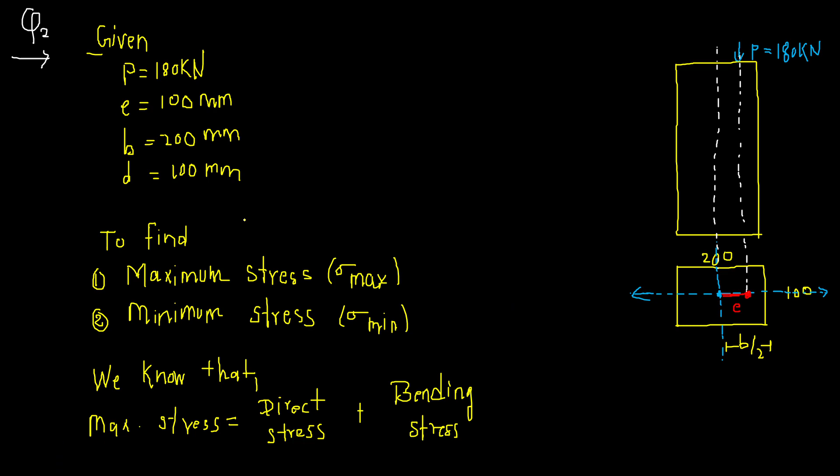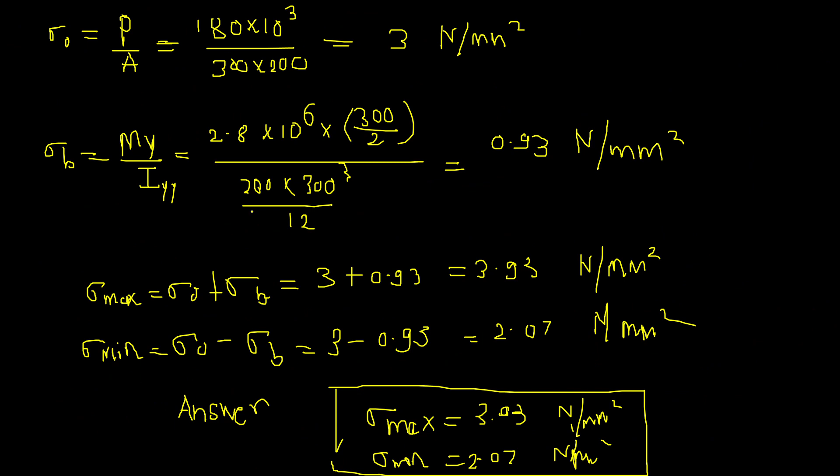So we have seen the first 5 problems of the assignment. So now we will start with the question number 6. Question number 6.

So a hollow cast iron column, CI म्हणजे cast iron column, of external diameter 250 mm and internal diameter 200 mm carries an axial load W and a load of 100 kN at an eccentricity of 175 mm.

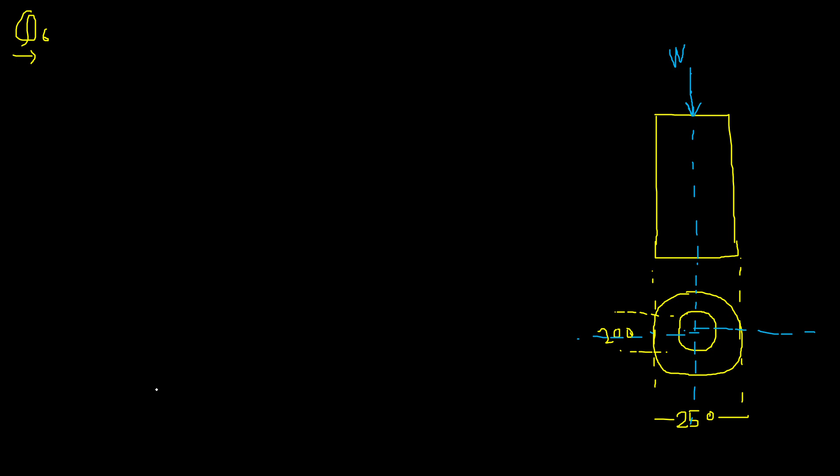अजून एक लोड आहे eccentric load of 100 kN. So it is present at some distance E. Okay, so this is the location of the eccentric load. So we will draw the line here. तर इथे अजून एक लोड आहे, that is P, eccentric load, and the value of this P is 100 kN. Okay, so this much is given.

आता काढायचं काय आपल्याला, we have to calculate the value of this W, जे W axial load आहे. So for calculation of this, one condition is given, that is we have to find out the minimum value of W so as to avoid any tensile stresses. Tensile stresses जे आहे आपल्याला avoid करायचे. Okay, so we'll start with the given.

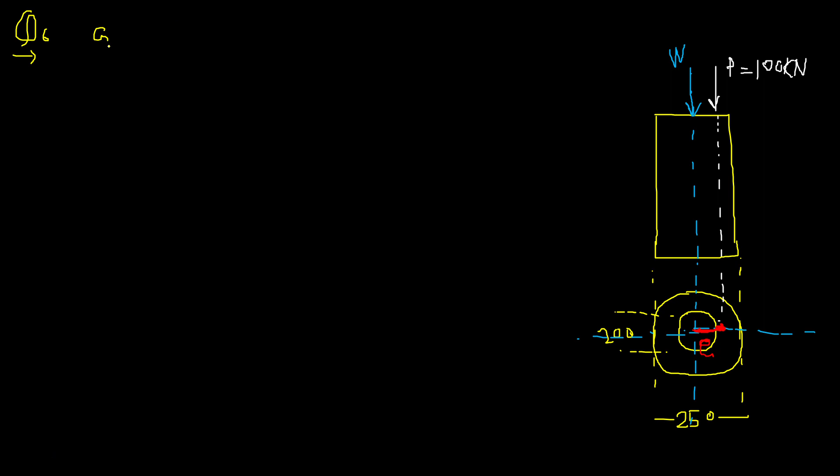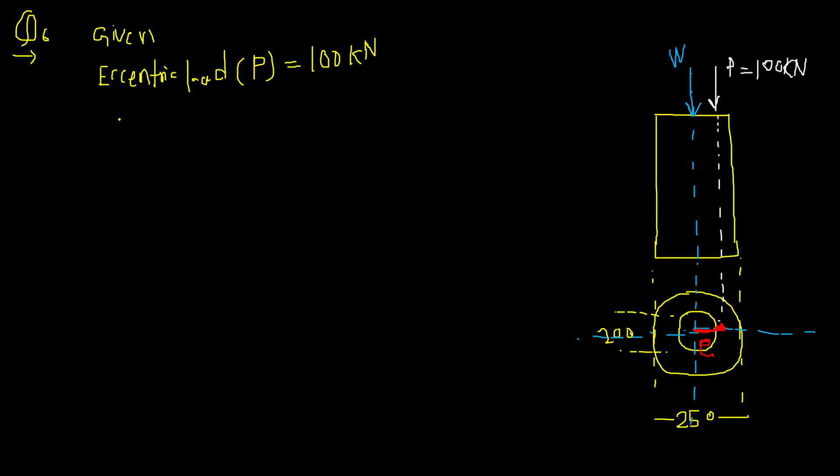So what is given in the question? Two types of load are given. So we'll write eccentric load P is equal to 100 kN. अजून एक कोणतं दिलेलं आहे, axial load. Axial load W is given, but we don't know the value of this. This we have to find it out. हे आपल्याला माहित नाही. So question mark.

Okay, आता total load किती राहील? Total load is axial load plus eccentric load.

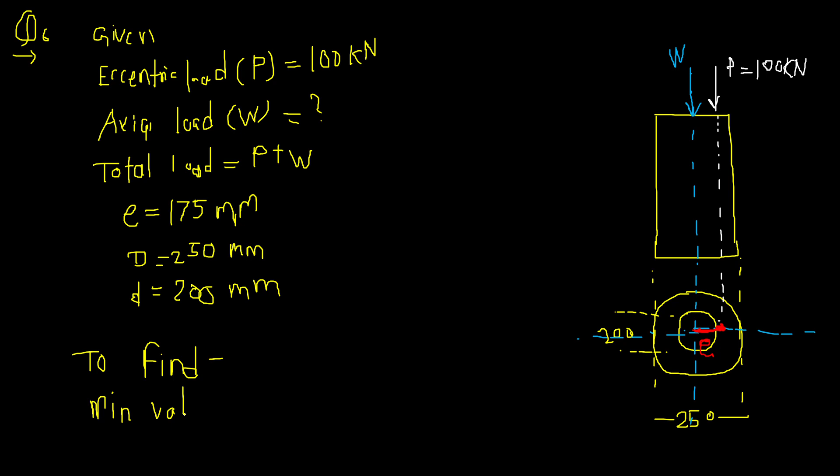So write down the statement what is given here to find. We have to find the minimum value of axial load म्हणजे W to avoid tensile stresses.

ओके, आता याच्यासाठी काय कंडिशन वापरावं लागेल? We will have to use this condition. We know that for no tension, sigma minimum, no tension मध्ये sigma minimum जे minimum stress आहे, that should be greater than or equal to 0.

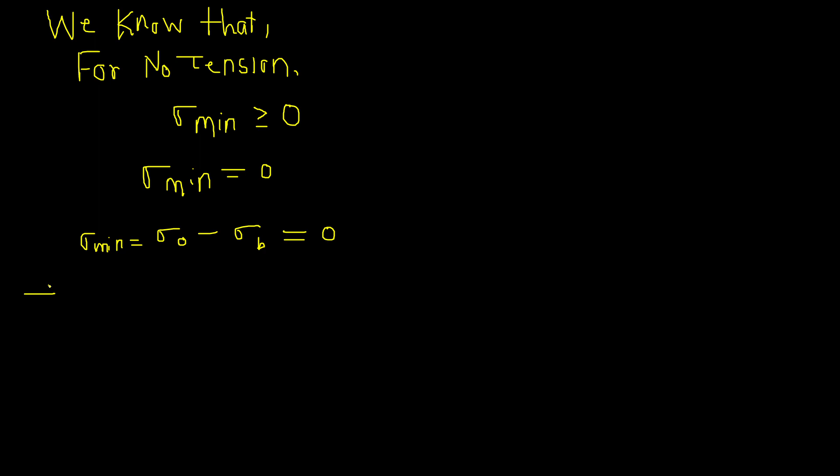So sigma minimum is greater than or equal to 0. This is the condition for no tension. So for finding out the minimum value of W, we will take sigma minimum is equal to 0. Now write down the formula for sigma minimum. We know that minimum stress is equal to direct stress minus bending stress. त्याच्या खाली हे लिहा sigma minimum is equal to sigma naught minus sigma b, and this is equal to 0. So from this we can write sigma naught is equal to sigma b.

Sigma naught is equal to sigma b, that is direct stress is equal to bending stress. Okay, so now find out the value of direct stress. Direct stress is equal to force divided by area, or we can say total load divided by area. आता total load किती घ्यायचा? P plus W, not only P, it is P plus W. So this is an important part here. P plus W divided by A, cross sectional area. Okay, P value 100 into 10 to the power 3, plus W ची value आपल्याला माहित नाही, divided by area.

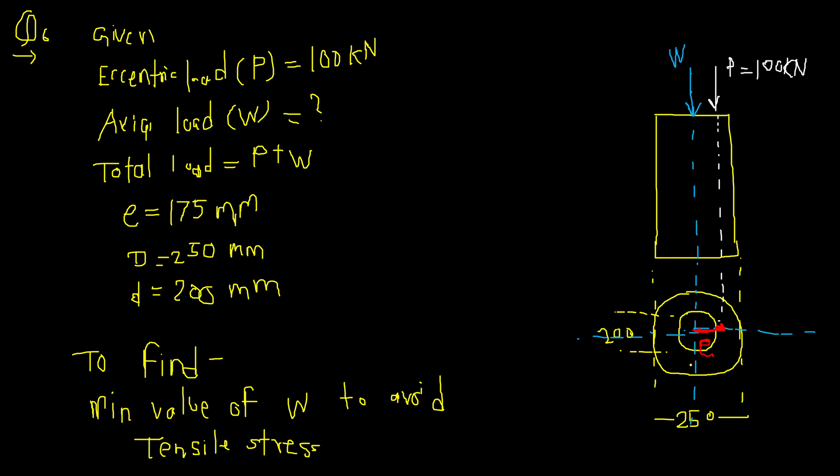So area is hollow circular section. Hollow आहे म्हणजे outer area minus inner area. So that is pi by 4 capital D square. Capital D is 250 square minus pi by 4 small d square. The pi by 4 common घेतलं, so pi by 4 into 250 square minus 200 square. So this is the value of sigma 0. Okay, now equation number 1.

Now next we will find out the value of sigma b. Sigma b चा फॉर्म्युला काय आहे? My by I. Now M is P into e. Y is capital D divided by 2, divided by I. सर्क्युलर सेक्शन आहे, IXX IYY दोन्ही सेम आहे, पण हॉलो सर्क्युलर सेक्शन असल्यामुळे outer moment of inertia minus inner moment of inertia. So pi by 64 into capital D to the power 4 minus small d to the power 4.

Okay, now substituting the values, P is 100 into 10 to the power 3 multiplied by e, 175, D is 250 divided by 2, divided by pi by 64 into capital D to the power 4 minus small d to the power 4, that is 250 to the power 4 minus 200 to the power 4. Okay, this is equation number 2.

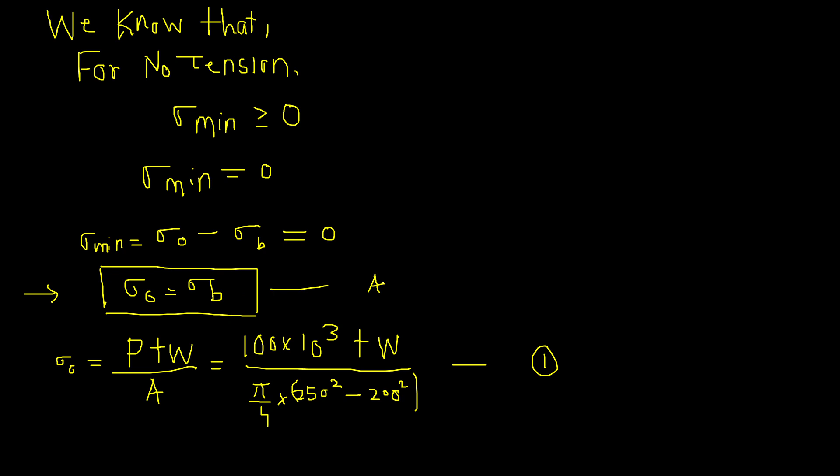But we know that sigma 0 is equal to sigma b. आपण हे नो टेन्शन कंडिशन वरून घेतलं ना. Hence sigma 0 ची व्हॅल्यू टाकायची: 100 into 10 to the power 3 plus W, divided by pi by 4 into 250 square minus 200 square, outer area minus inner area. This is equal to sigma b.

Sigma b is 100 into 10 to the power 3 into 175 into 250 divided by 2, divided by pi by 64 into 250 to the power 4 minus 200 to the power 4.

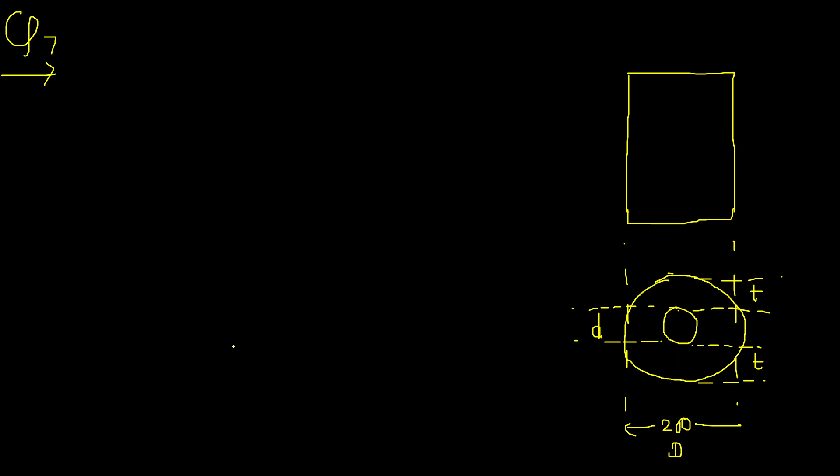Now the next statement is a vertical compressive load acts at an eccentricity of 60 mm from the axis. So there is an eccentric load acting. This is y axis, x axis. This is the location, at an eccentricity of 60 mm from the axis. Okay, so we'll start writing now. We have to find the greatest load that can be allowed on this column.

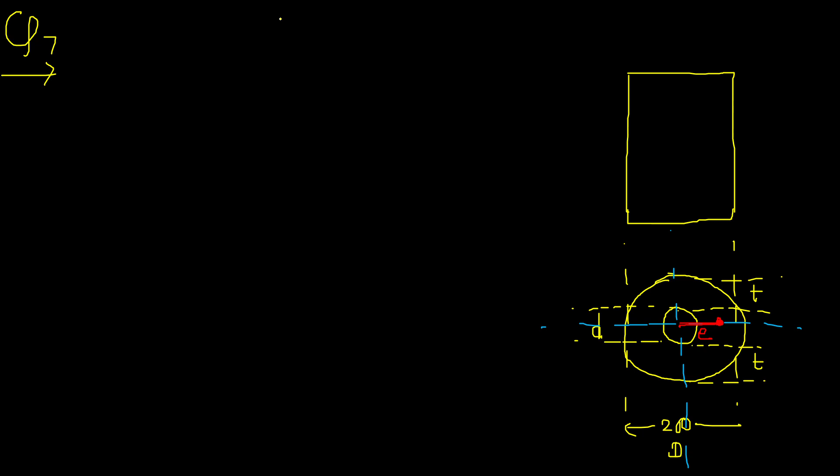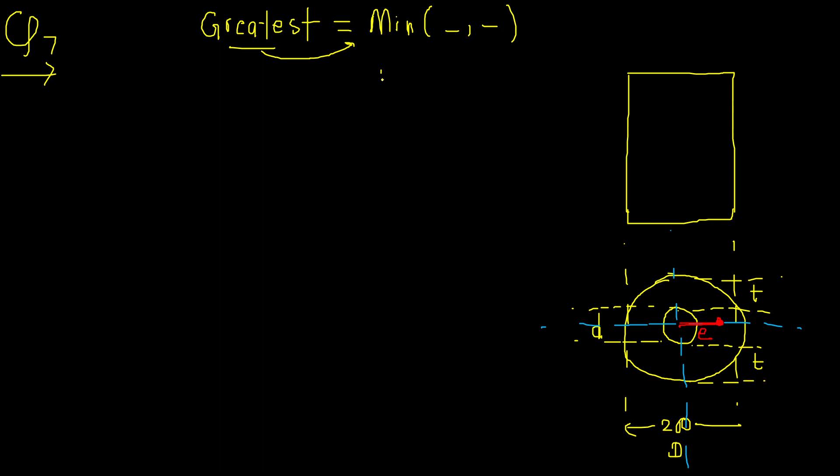म्हणजे उलट करायचं नेहमी. If it is asked find out the greatest value, then we should use the minimum of those two values. If the question says find the minimum value or find the minimum reinforcement, then we will take the maximum of the two values. Okay, so in this question, first write down the given.

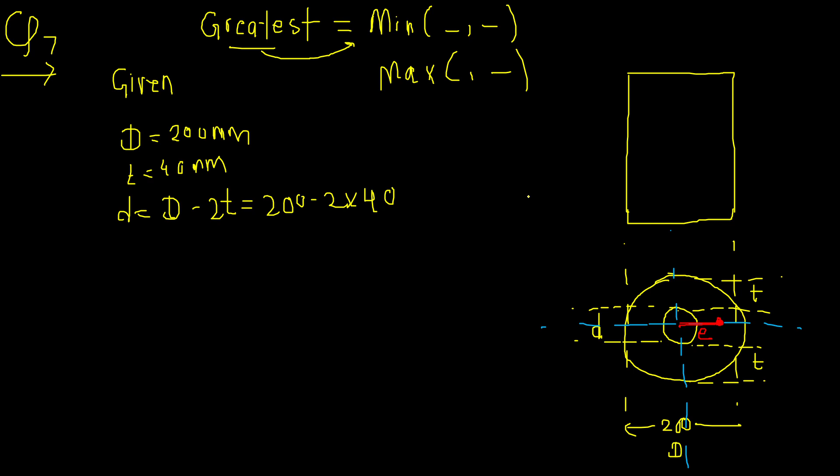So given things are, external diameter is given. External diameter दिलेला आहे किती आहे, 200 mm. Thickness is given. Thickness is 40 mm. So inner diameter कसा काढायचा, external diameter minus 2t, that is 200 minus 2 into 40, that is equal to 200 minus 80. तर हे किती झालं, 120 mm. Okay, so this is the internal diameter, 120 mm.

Other than this, there are two things which are given. पहिला आहे maximum permissible stress and second one is the minimum permissible stress. आता maximum permissible stress जे आहे, that one is 80 megapascal आणि समोर लिहिलेला आहे compressive.

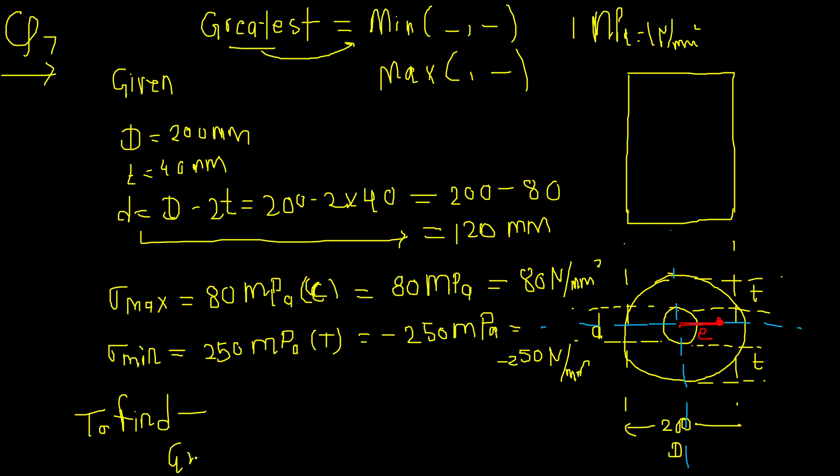आता हे सगळं given झालं. Next, what we have to find, we have to find the greatest load P. Greatest load काढायचं आहे. ठीक आहे.

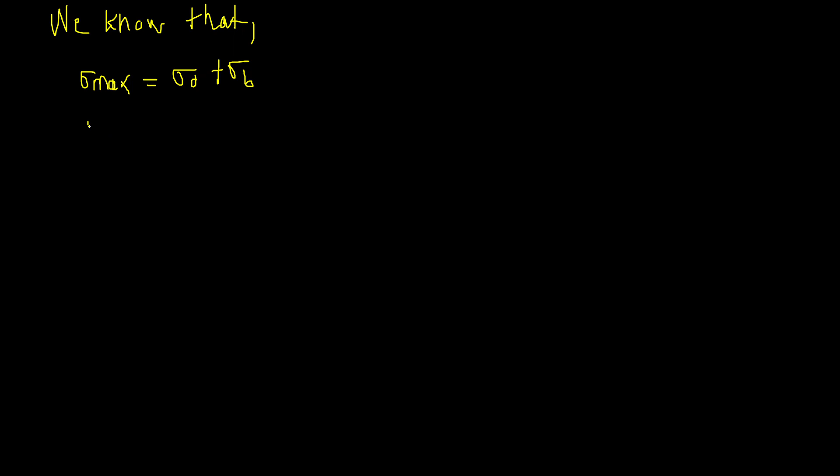So now we will write, we know that आता sigma max आणि sigma minimum दिलेले आहे, so we'll use those formula. Maximum permissible stress is equal to direct stress plus bending stress, and minimum compressive stress is equal to direct stress minus bending stress.

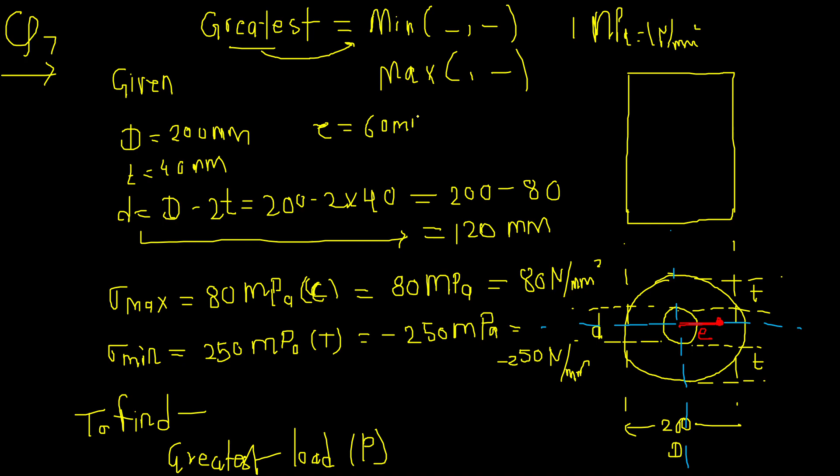So we'll substitute all the values here. P into e value is, okay, e value we have not written in given, so write down the value of e in this given. e is equal to 60 mm. So P into 60 into D by 2, that is 200 divided by 2, divided by pi by 64 capital D to the power 4 minus small d to the power 4. This is equation number 2.

ठीक आहे, बघा याला आपण थोडंसं solve पण करू शकतो. If you solve this then it will be more easy. So we'll find out these answers in terms of P. Okay, so 1 by pi by 4 into 200 square minus 120 square. So हे येणार 4.97 into 10 to the power minus 5 P. ठीक है, हे आपलं equation number 1.

Similarly second equation पण solve करा. That is 60 into 200 by 2 is 100, divided by pi by 64 into 200 to the power 4 minus 120 to the power 4. So याला जर solve केलं तर it should come 8.77 into 10 to the power minus 5, and this is equation number 2. Okay, इथे P राहिला लिहायचा. आपण in terms of P काढतोय. So it is 8.77 into 10 to the power minus 5 P.

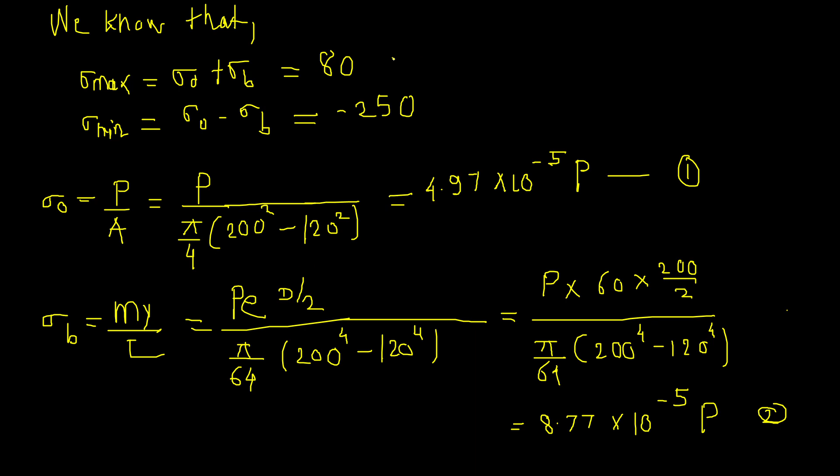So sigma naught is 4.97 into 10 to the power minus 5.

4.97 into 10 to the power minus 5 P plus sigma b. Sigma b is 8.77 into 10 to the power minus 5 P. This is equal to 80. So find out the value of P in this case. It will be 80 divided by 4.97 into 10 to the power minus 5 plus 8.77 into 10 to the power minus 5.

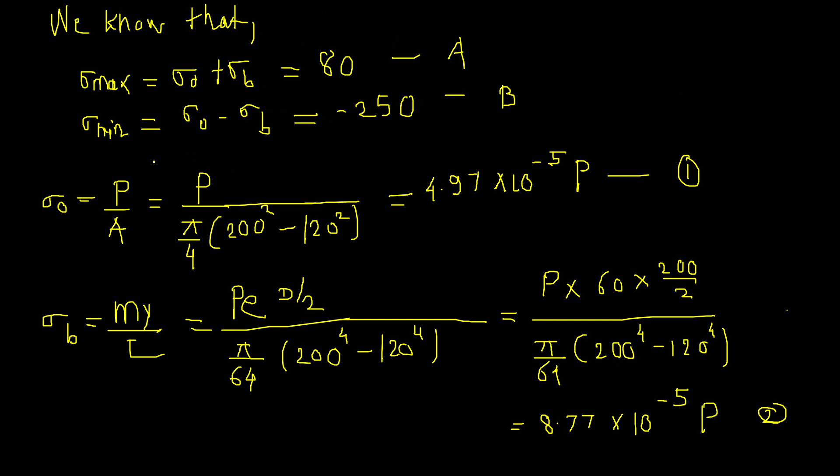Sigma naught minus sigma b, that is 4.97 into 10 to the power minus 5 P minus 8.77 into 10 to the power minus 5 P is equal to minus 250. So from this you will get the another value of P. That is minus 250 divided by 4.97 into 10 to the power minus 5 minus 8.77 into 10 to the power minus 5.

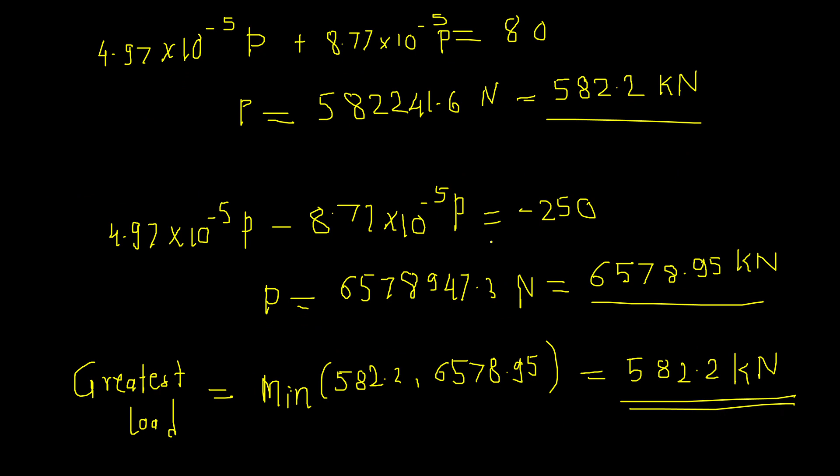Now we'll see the next question, that is question number 8. A line of thrust in compression testing specimen 20 mm in diameter. So question number 8, it is very easy. So given diameter is 20 mm. A compression testing specimen 20 mm in diameter is parallel to axis of specimen but is displaced from it. Find the eccentricity if maximum compressive stress is 20% greater than direct stress. So what we have to find here? We have to find the eccentricity.

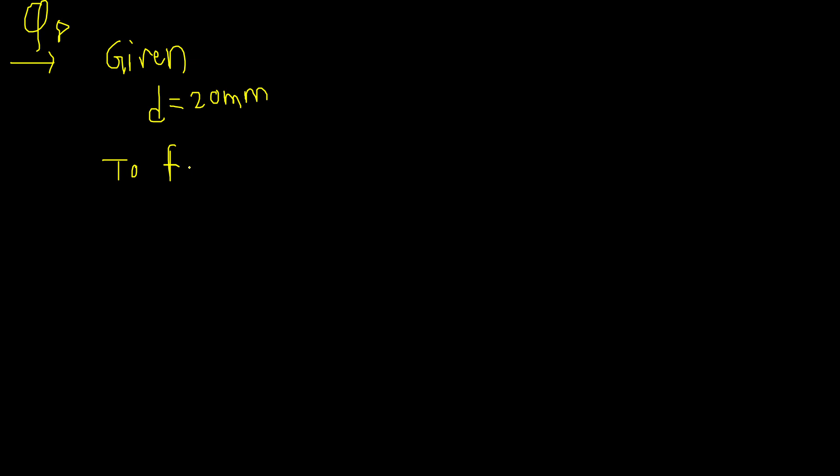Eccentricity कशाने denote करतो आपण? E. So we have to find this E value. And what is given to us? It is given to us that, write down the statement, maximum stress म्हणजे sigma max is 20% greater than

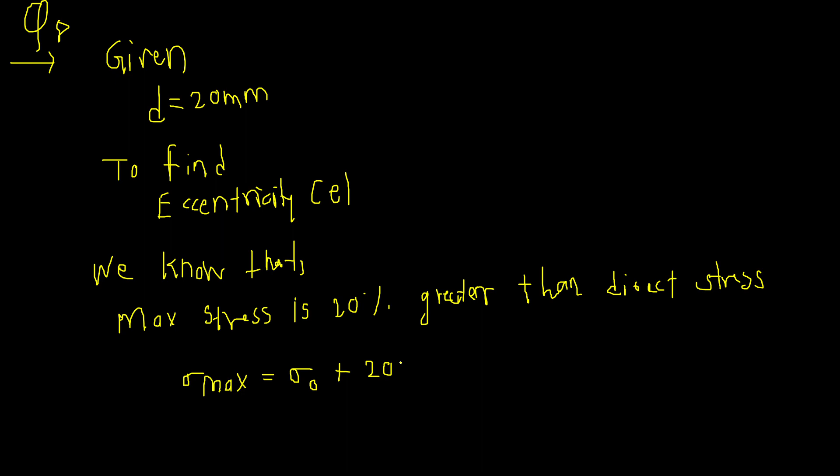So this we can write it as sigma naught plus 20 divided by 100, 0.2 sigma naught. आता sigma naught plus 0.2 sigma naught is 1.2 sigma naught. So this is the condition: sigma max is equal to 1.2 sigma naught. But what we know? What is the formula for sigma max? Sigma naught plus sigma b. But sigma max is equal to 1.2 sigma naught according to given condition. So 1.2 sigma naught is equal to sigma naught plus sigma b.

So sigma naught जर इकडे गेलं तर 1.2 sigma naught minus sigma naught is equal to sigma b. That is 0.2 sigma naught is equal to sigma b. Now this is the very important condition that we have got. So 0.2 into sigma naught, direct stress P divided by A, force divided by area, sigma b is My by I. M ला काय लिहू शकतो आपण? P into E.

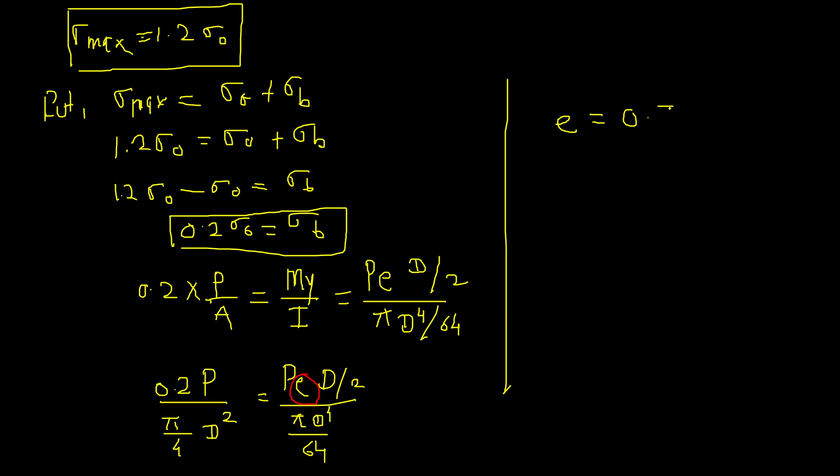So solve this and then after solving you should get the answer. E is equal to 0.5 mm. Okay, so this is the question number 9.

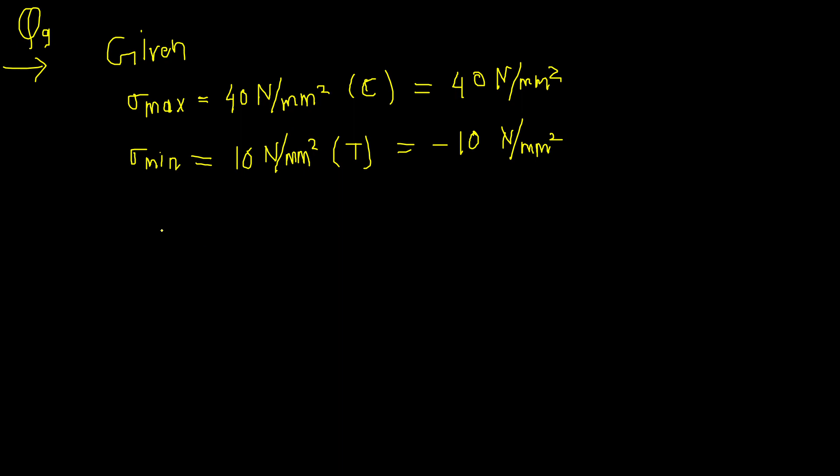And we have to find out the stress at the center of the section and its nature. So we have to find first stress at center of section. So if you know the concept, stress at the center of section is nothing but the direct stress.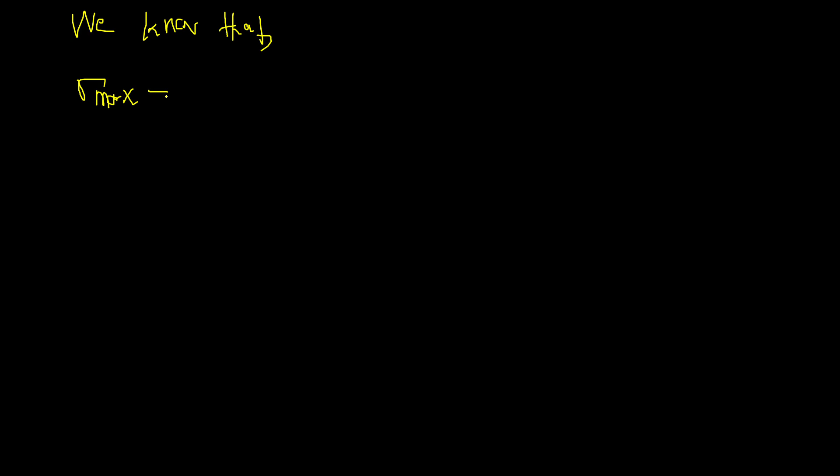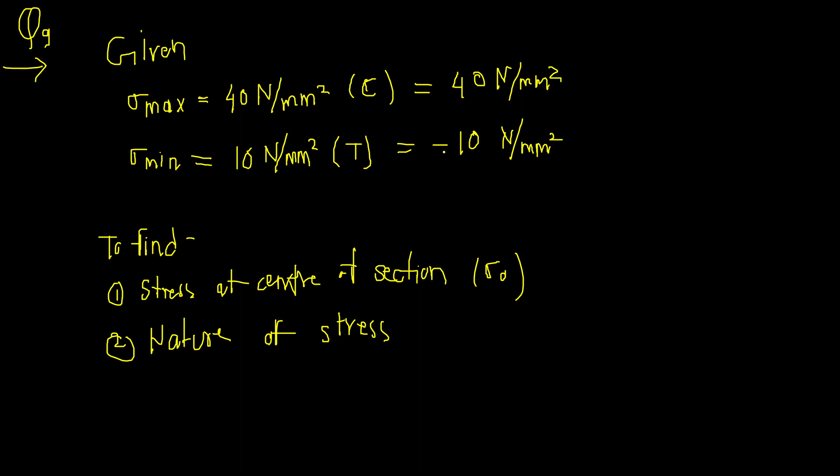Okay, so this value is given. What is this value? 40 Newton per mm square. So I am writing here 40. Next is minimum stress is equal to direct stress minus bending stress, and this value is -10, not 10. This is -10. So this is equation number 1, equation number 2. Adding equation 1 and 2.

Adding both, sigma naught plus sigma naught is 2 sigma naught, plus sigma b minus sigma b will get cancelled, is equal to 40 minus 10, 30. So sigma naught is equal to 30 divided by 2, that is 15 Newton per mm square.

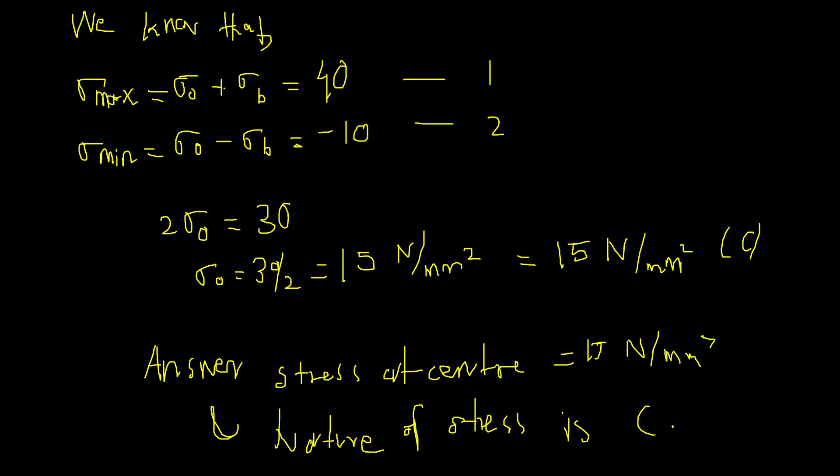Answer: stress at center of section is 15 Newton per mm square. And nature of stress, what is it? Nature is compressive.